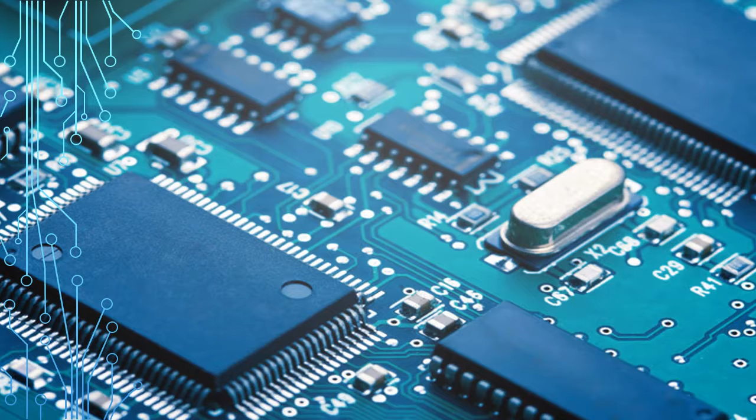Thank you. Hi, my name is Olsha Benjamin, and I will start our presentation for today. Let's begin. What is a circuit board? A circuit board is a self-sufficient module comprising of interrelated electronic components. Circuit boards can be found in devices such as cell phones, laptops, and television devices.

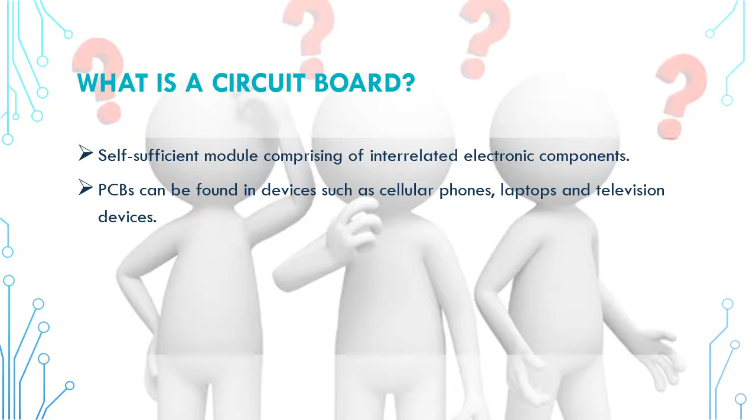When did the first circuit board come into usage? The first patent, which was called the printed wire, was issued in the early 1900s by a United States native called Charles Ducas. And what this patent said was that PCBs will have an electrical pathway directly on its surface that was insulated via printing through a stencil with electrically conductive ink.

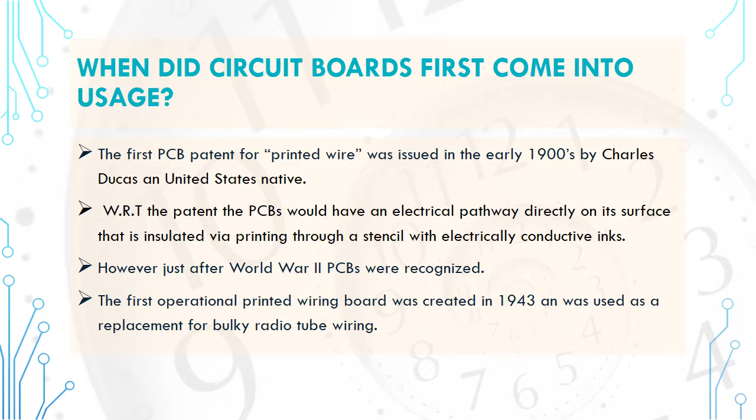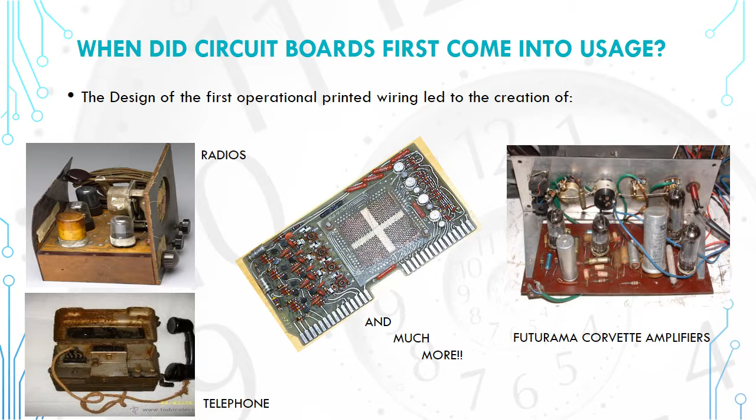However, just after World War II, PCBs were recognized. The first operational printed wiring board was created in 1943 and was used as a replacement for bulky radio tube wiring. The first operational printed wiring led to the creation of radios, telephones, and also amplifiers. The evolution of printed circuit boards: the past, the now, the future.

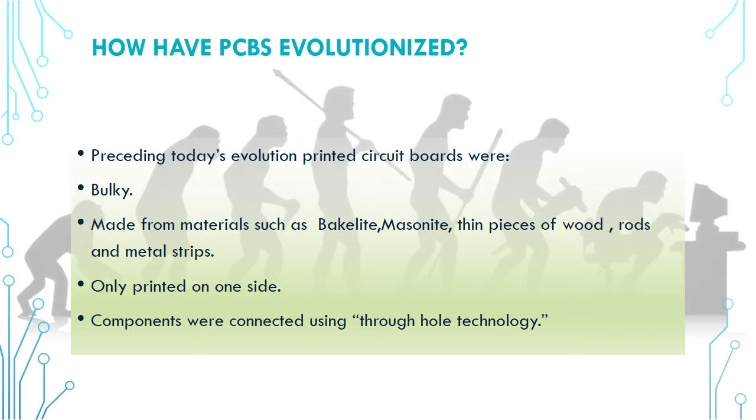PCBs now use surface-mounted technologies and are made from materials such as gold, palladium, silver, copper, fiberglass, and other materials. Circuit boards now are also single-sided, double-sided, and multi-layered. They are also small and compact.

What is expected of future circuit boards? They should use the package-on-package method and three-dimensional molded plastic boards. Also, there should be an increase of integrated circuit chip use, as well as embedded components, which will keep the design and manufacture of printed circuit boards a constantly evolving industry in the years to come.

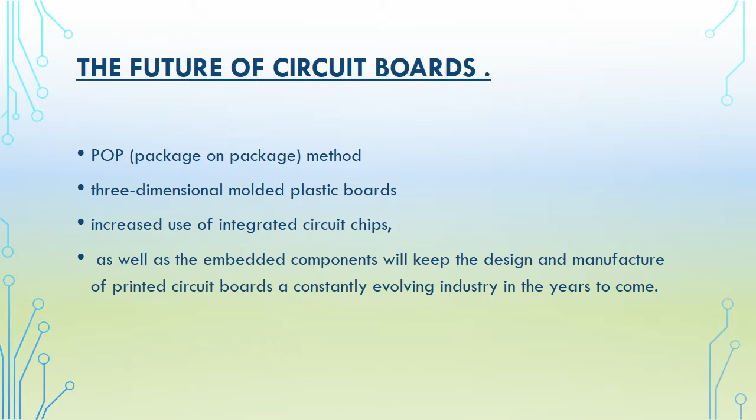Types of circuit boards. There are three types of circuit boards: single-sided, double-sided, and multi-layered printed circuit boards. Single-sided PCBs include just one layer of base material, also known as substrate. Only one side of the board would have electrical components, while on the other side, the solder is solidified to the component's lead to keep it in place. Sadly, they're rarely used because of their intrinsic design limitations.

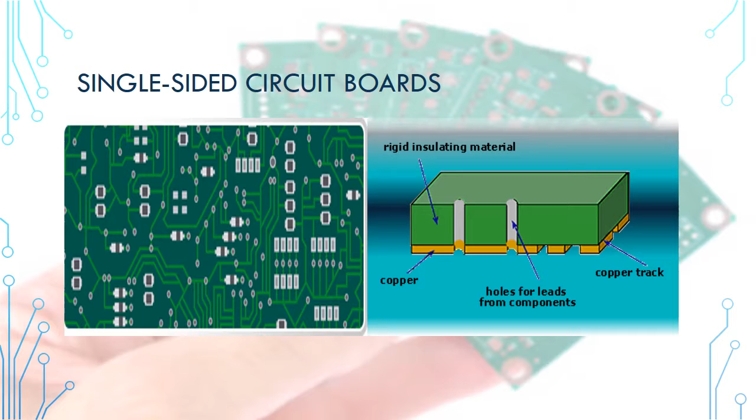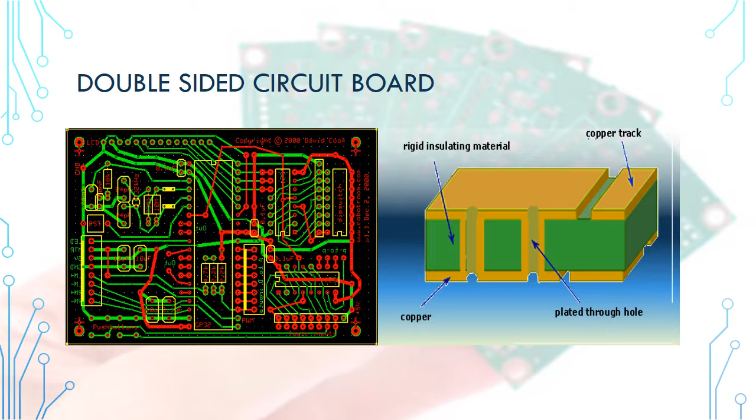On the other hand, double-sided PCBs use both sides of the board's substrate, including metal conductive layers, which elements are attached to. Holes in the PCB let circuits on a single side attach to circuits on the other side using one of two techniques: through-hole and surface mount technology, as pointed out before. Now, for multi-layered PCBs, extra layers are added beyond the top and bottom layers seen in the configuration of the double-sided shown before. This allows the multi-layered PCB to be comprised of more components than other boards discussed previously.

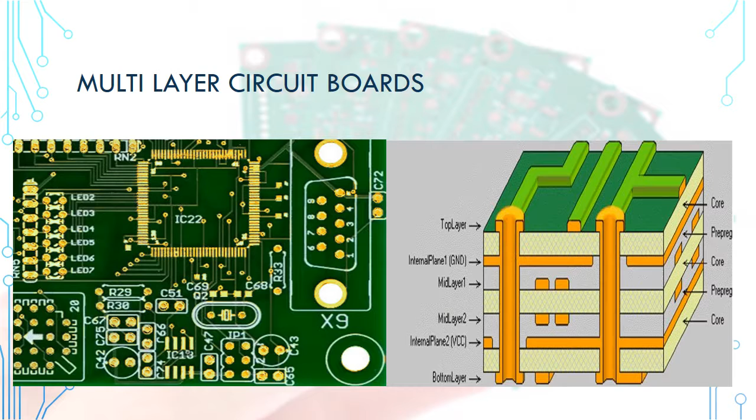An integrated circuit, sometimes called a microchip, introduced in the year 1958, is a semiconductor wafer on which thousands of tiny resistors, capacitors, and transistors are fabricated. These types of chips can function as an amplifier, timer, or microprocessor, and much more. Thanks to these microchips, more components are able to fit on a printed circuit board, thereby making it more compact and useful in today's world.

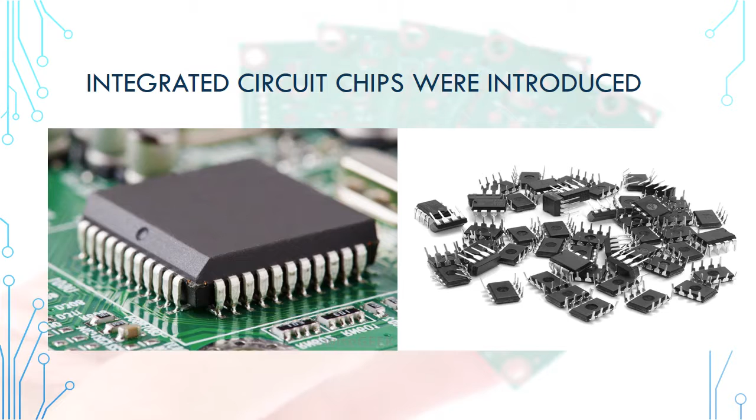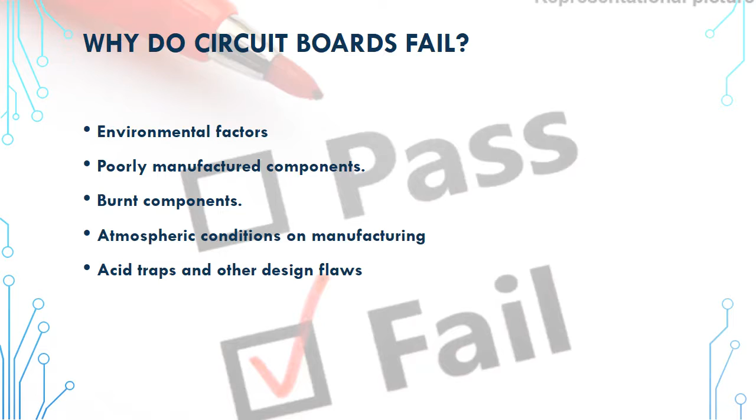Sadly, there are several reasons why circuit boards fail. These are due to environmental factors, burnt components, acid traps, and other design flaws. But it's important to recycle circuit boards. Why? Because 1. It reduces the amount of electronic scrap heading to the landfills. 2. It produces revenue for work. And 3. The working components can be reused.

The problem statement states, the disposal of printed circuit boards has always been a prominent problem in the electronic industry, since the primary disposal methods are a threat to the environment. In this regard, there is an increasing need for more environmentally friendly methods such as recycling. Industrial Solutions Ltd. has contracted our engineering firm to design a machine that is capable of deconstructing printed circuit boards, that is, PC motherboards, for recycling purposes.

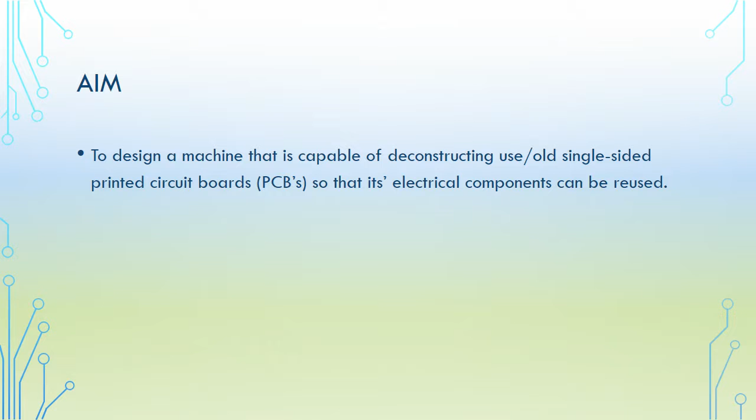Our aim as a team is to design a machine that is capable of deconstructing used single-sided printed circuit boards so that its electrical components can be reused. In order to do this, we as a team need to first accomplish certain objectives, such as to conduct a comprehensive literature and patent review, to understand the fundamental process of circuit board decomposition, to develop required specifications for the design, to develop alternative designs for circuit board decomposition, and select a design that best accomplishes the desired tasks and requirements, to test and analyze the chosen design, and also to obtain engineering and manufacturing specifications for the chosen design.

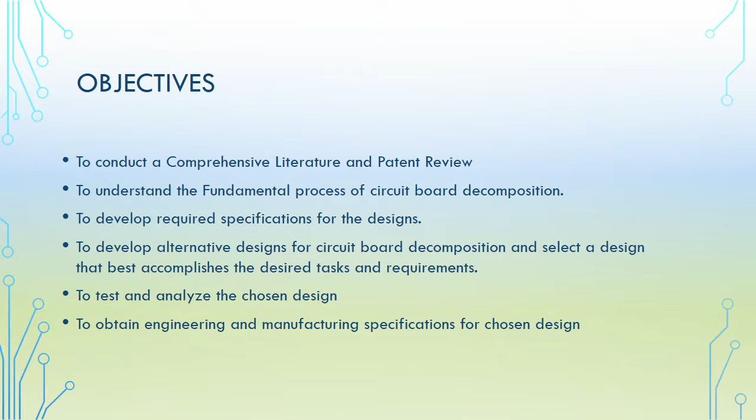Hello, my name is Makila Luke, and for this section of the project, I will be doing a general overview on the patents. Up first, we have the parts disassembly apparatus, and this patent deals with the removal of components from a printed circuit board via the disassembly of parts method, as the title implies. The PCB, which is short for printed circuit board, is heated in a furnace via an IR heater at about 190 to 250 degrees Celsius in order to melt the solder. After the solder is melted, an external force is applied in order to dislodge the components from the circuit board, and this is done with the help of metal brushes to scrape the components off.

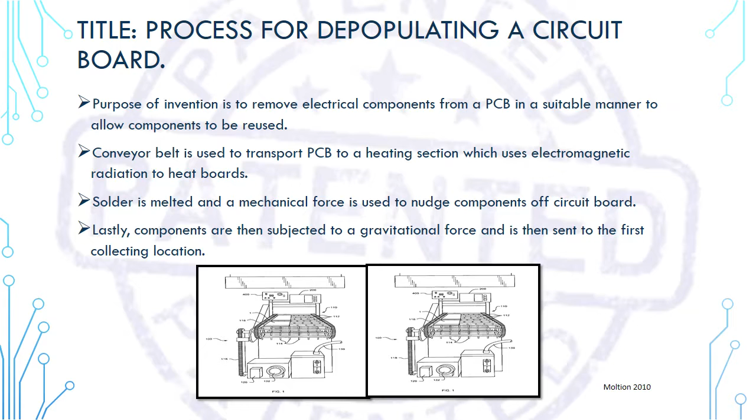Moving on to patent number 2, we have the process for depopulating a circuit board. The purpose of this invention is to remove electrical components from a PCB in a suitable manner so that they can be reused. What happens here is that the PCB is transported via a conveyor belt to a heating section which uses electromagnetic radiation to heat boards. Solder is melted and a mechanical force is used to nudge the components off the circuit board. After this is done, the components are then subjected to a gravitational force and sent to the first collecting location.

Lastly, we have the last patent, which is the process and apparatus for the automatic removal of the components. This focuses on the automatic removal of components mounted on a PCB as the name implies. The device consists of a lighting device, an optical sensor, an image processing system, and a device to remove components. The PCB is heated in order to allow the differentiation between the components and the printed circuit board, and this is done due to their varying thermal conductivities. After the heat is applied and the solder is melted, a gripper is used to take the components off the circuit board. And after the automatic removal, the components that are recyclable are sorted and stored in various slots for further use.

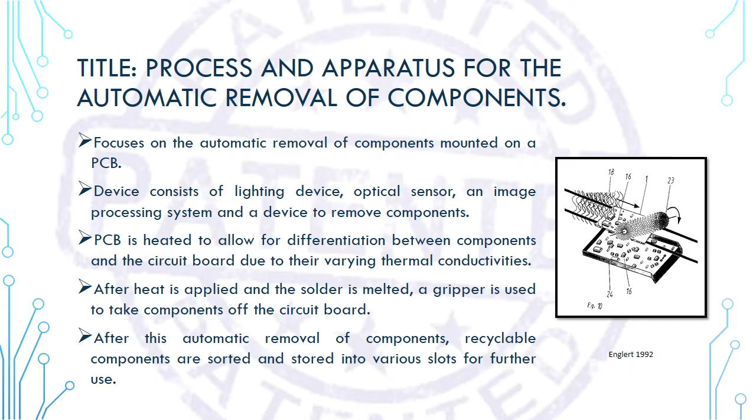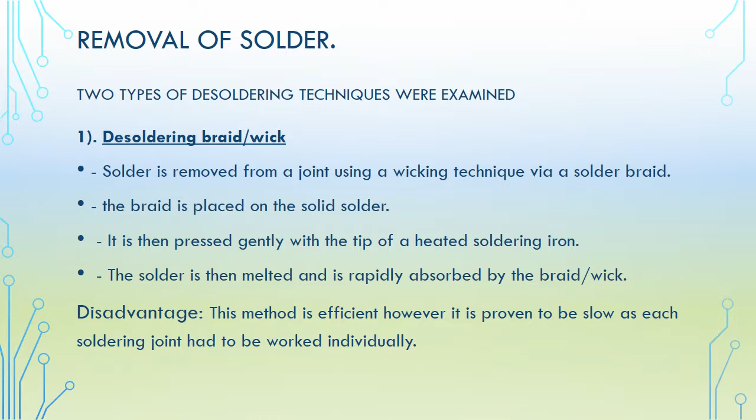Now, we will look at the removal of solder, and this is done using various techniques. However, for this project, we will be looking at two. The first one being a desoldering braid or wick. Solder is removed from a joint using a wicking technique via a solder braid. The braid is placed on a solid solder. It is then pressed gently with the tip of a heated soldering iron, the solder is melted, and it is then rapidly absorbed by the braid or wick. The disadvantage of this method, however, is that it is efficient, but it is proven to be slow as each soldering joint has to be worked individually.

The second method that we will look at is desoldering with a heating gun, and this is one of the most common methods used. The board is strategically placed on a very flat surface, and then the heating gun is used to desolder the components within a matter of seconds. The solder is melted while the components become loose, and then tweezers are used to separate the components from the circuit board. The disadvantage of this method is that it can be very difficult when small and individual components are taken into consideration. This is because heat that melts the solder on parts that are closely situated can dislodge components that are not meant to be desoldered.

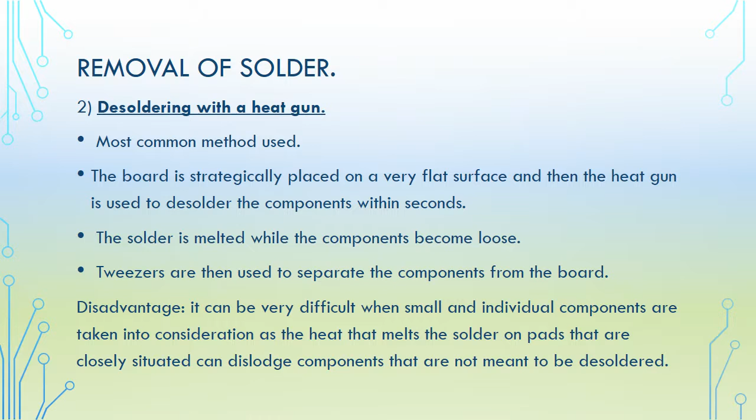The client and user requirements were then analyzed to highlight the main characteristic traits of the desired machine, thus producing portability, efficiency, user-friendly, cost, and low environmental impact.

The main attributes were then used to develop a metrics table which provides a ranking system for future design concepts to assess how well the design achieves the requirements defined by the user and client. Here shows each ranked from not good to very good.

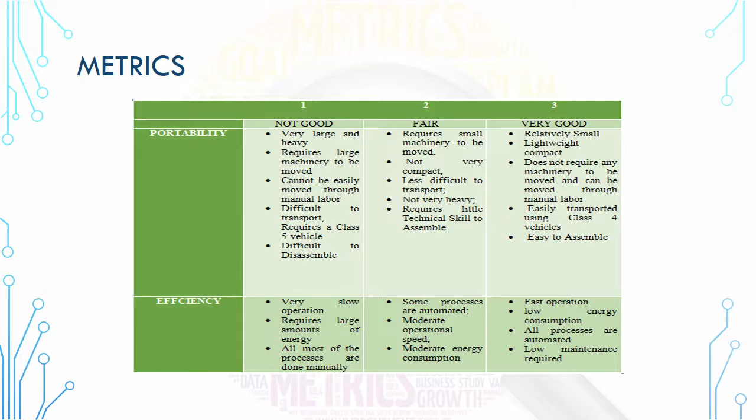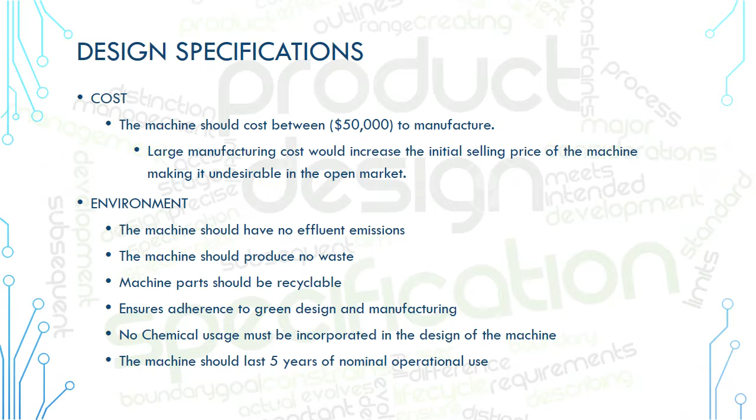Design specifications act as a framework to guide in the creating of conceptual designs that would achieve the requirements prescribed by the client and user. The following points outline the design specifications that are integral to the creation of a circuit board decomposition machine. Cost. The machine should cost between $50,000 to manufacture. Environment. The machine should produce no waste.

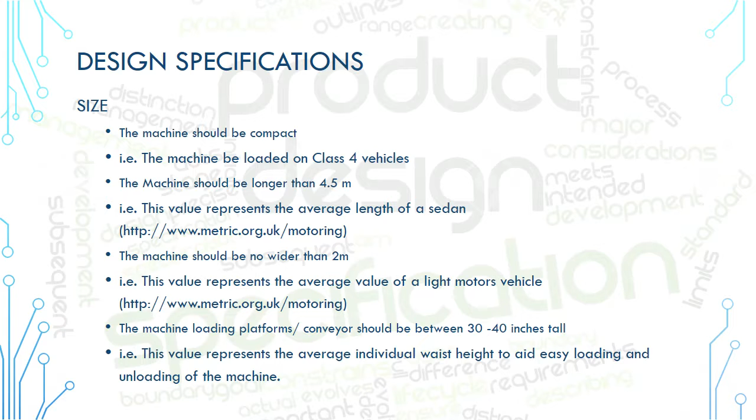Safety. The machine noise level should not exceed 60 decibels and it should be properly ventilated. Function. The machine should take less than 90 seconds to remove the components from one circuit board. The solder should be removed via heating processes. Size. The machine should be compact, meaning that it could be loaded on Class 4 vehicles. Materials. The material should be obtained locally and contain no less than 50% recyclable material.

For the pairwise comparison, each main attribute was ranked to show their importance towards creating a comprehensive design. With this, it was observed that efficiency and user-friendly had the highest ranking at 28%. Second is low environmental impact and cost at 20%. And third is portability at 4%.

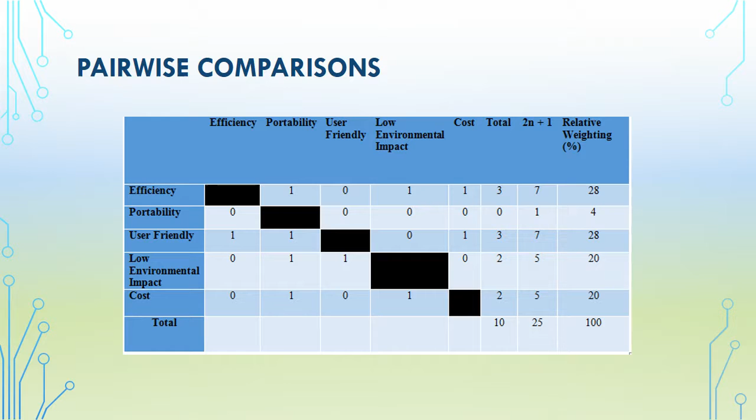Hello, my name is Ryan Cummings, and I'll be taking over for this part of the presentation where I'll be discussing the various conceptual designs that are being put forward by our design team.

In order for us as a design team to come up with conceptual designs that meet the desired client and user requirements outlined in the previous slides, we must first look at the main components of a system, which is shown here using a functional decomposition chart. The chart shown here outlines the main or important sections of a design that must be fulfilled in order to meet the desired requirements.

In order to construct a machine of this nature, the following are the required inputs that the machine needs. For example, the used/damaged PC laptop motherboards, which are destined to be recycled, electrical energy, mechanical energy, and human energy, which is then passed on to the processes, where the main process is to decompose the old/used PC motherboard. And then the output of the system would be separated electronic components, clean circuit board, heat energy produced from the various processes, and also sound and noise energy as a result of those processes.

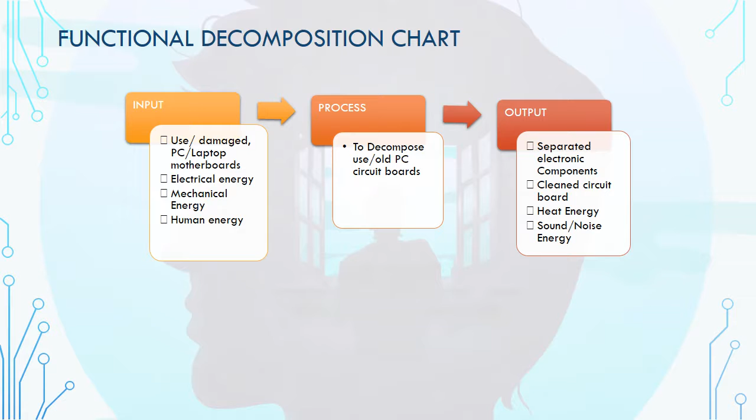The functional decomposition chart can be further broken down into a flow chart to show the various sub-processes that make up the desired machine. As you can see here, the energy input, usually inputted by using electrical energy, is converted to mechanical energy, which is used to drive conveyor belts and shaft, etc. Also, the operator inputs the mechanical energy needed, which is usually to place the circuit board components onto an assembly.

The solder is then removed, which is controlled using a signal, which is used to set the operational temperature. This process produces an output of heat energy. Also, electrical energy is needed at this point in order to generate the heat. The next process is the component removal. Then the output of the system would be the through-hole connected components. As a result, this produces sound energy, and also an output from the system would be the remaining surface components and the circuit board, from which the through-hole connections have been removed, and also a visual interface for the operator.

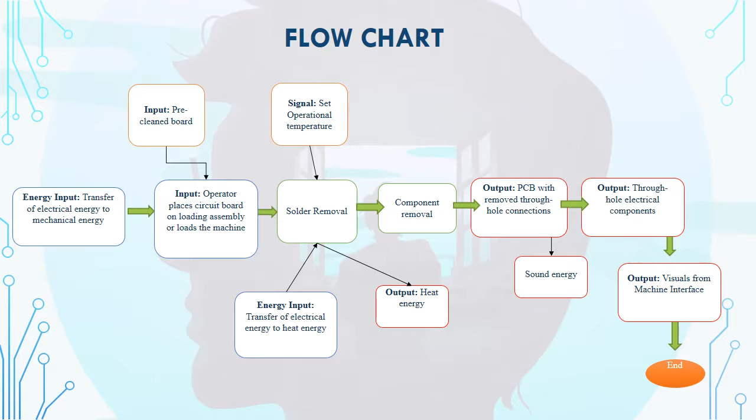To aid in the design process, a morphological chart was developed. This is a table based on function analysis and is used as a guide to generate design for the sub-processes outlined in the leftmost column. So for this chart, the sub-process needed for the recycling machine is outlined in the leftmost column, and then across the rows represents the different ways in which each process can be done.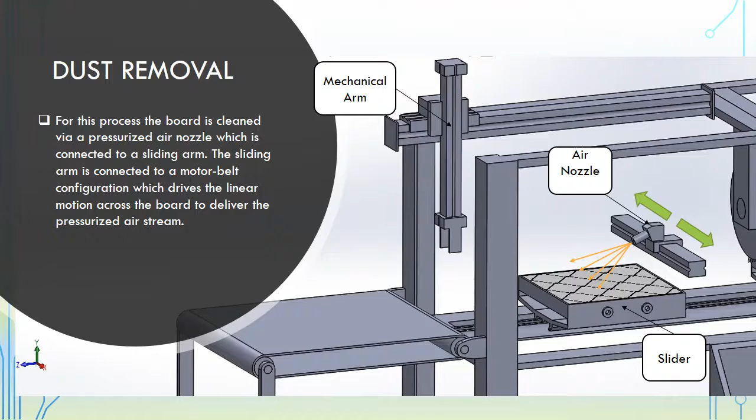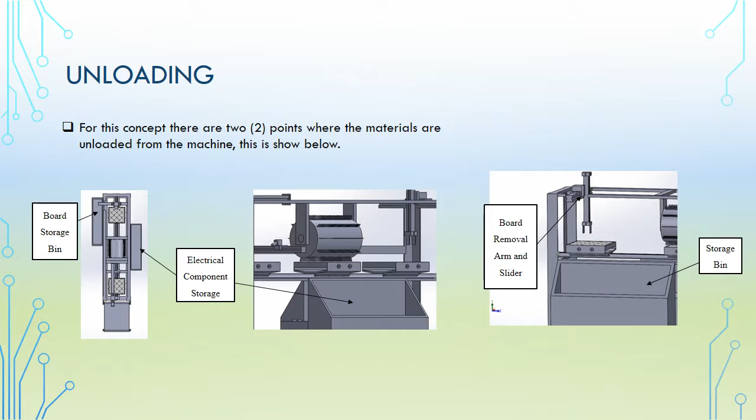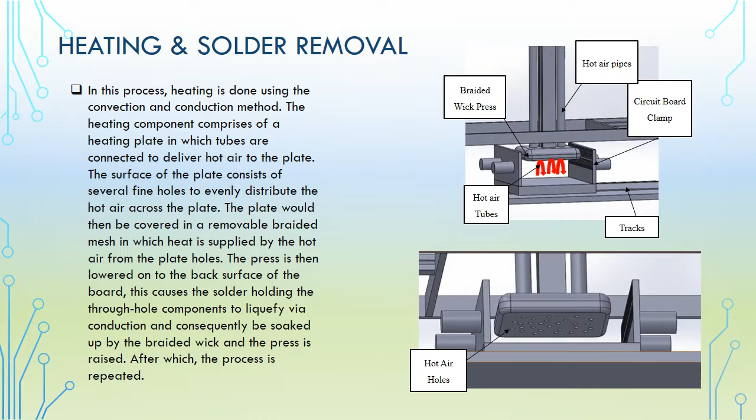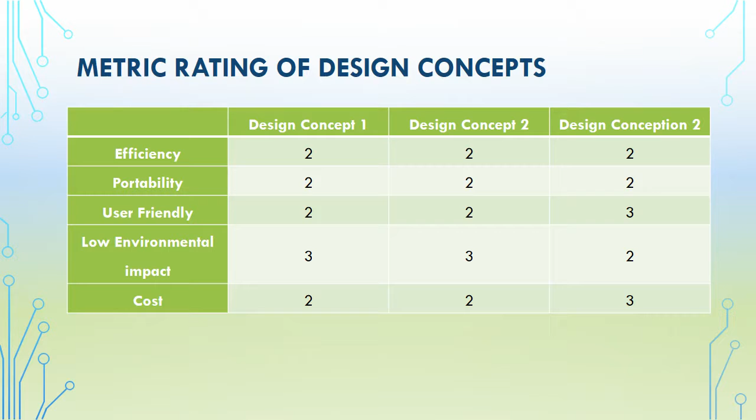Before a design is selected, it must first be judged, using the metric rating system established earlier. Each design will be ranked and their score is then recorded and tabulated in the table shown. In this table, the leftmost column represents the main attributes which were ascertained from the client and user requirements. The table shows the ranking of each design concept with respect to each category.

The raw scores were then taken and analyzed using a selection matrix, where the relative weightings of the main attributes from the pairwise comparison chart shown previously are multiplied by the raw score to produce the weighted score. This is done for each design for a particular design attribute.

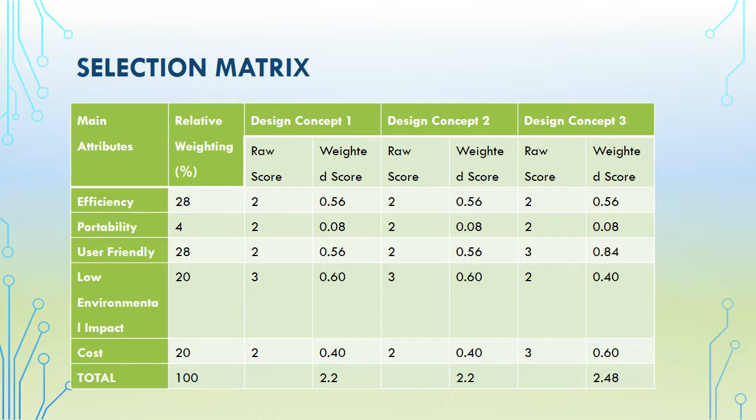For example, in the first row, under relative weighting from the pairwise chart, efficiency was found to have a relative weighting of 28%. Design 1 had a raw score of 2 in the efficiency section, which then produces a weighted score of 0.56. This is repeated for each design and each main attribute. The total is added up and then the design with the highest score is selected, as this design best meets the client and user requirements.

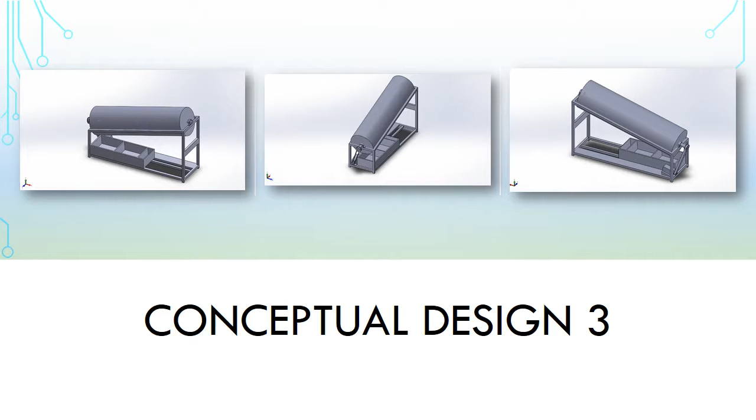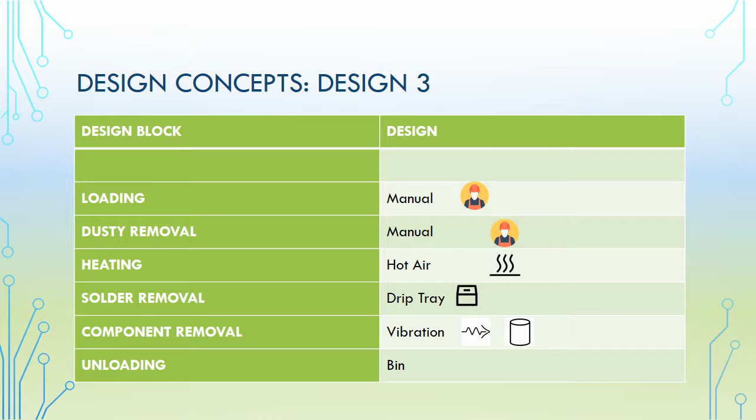And now for the chosen design. Now we will look at conceptual design three. This table also shows the morphological chart breakaway, highlighting all the major design elements used in the creation of conceptual design three. For this design, loading is done via a manual process, heating is done via convective hot air, and solder removal is done via the drip tray, etc.

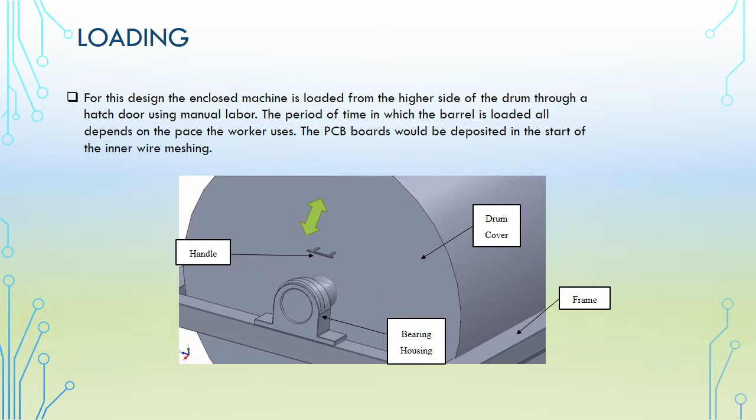For this design, the enclosed machine is loaded from the higher side of the drum through a hatch door using manual labor. The boards are deposited onto the inner mesh of the rotating drum. From this image, we can properly see the internals of the machine. The green arrow shows the directional placement of the circuit boards into the machine as they are placed in batches onto the inner wire mesh.

Heating for this machine is done via a convective process. Hot air is fed into a barrel using two insulated tubing systems and dispersed throughout the enclosure, over which the circuit board's solder is heated while in the process of component removal.

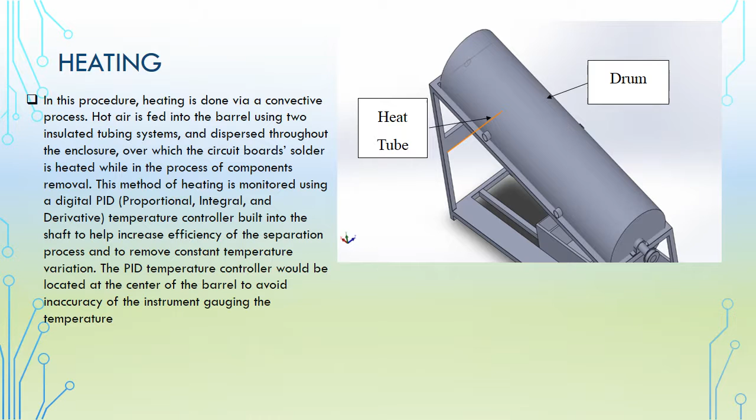This method of heating is monitored using a digital PID, which is a proportional, integral and derivative temperature controller, built into the shaft to help increase efficiency of the separation and the process to remove the components at constant temperature. The PID temperature controller would be located at the center of the barrel to avoid inaccuracy of the instrument gauging the temperature. This image shows the location of all the internal components of this design.

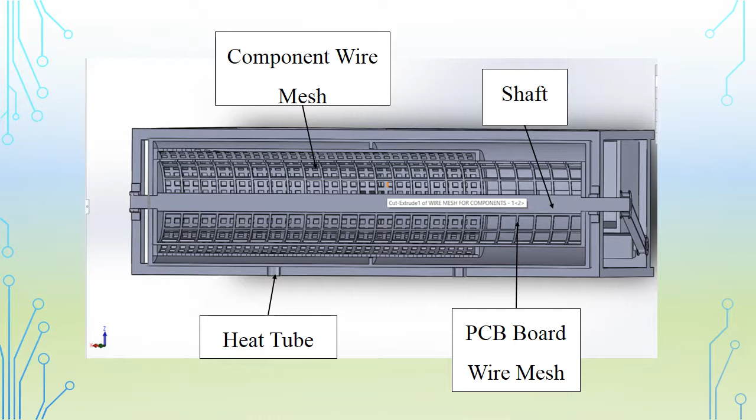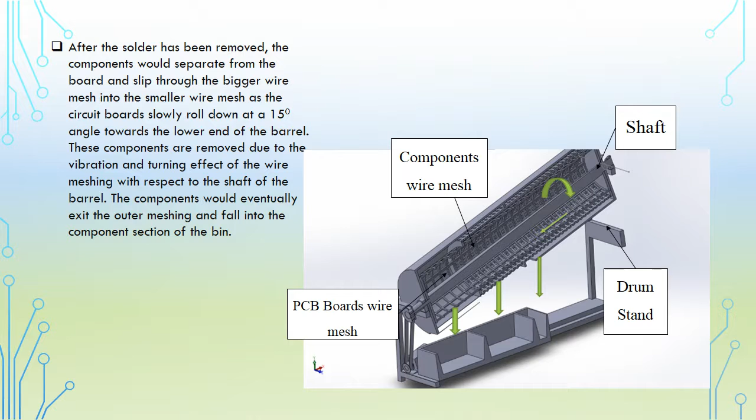After the solder has been removed, the components would separate from the board and slip through the bigger wire mesh into the smaller wire mesh as the circuit board slowly rolls down at a 15-degree angle towards the lower end of the barrel. These components are removed due to the vibration and turning effect of the wire meshing with respect to the shaft of the barrel. The components would eventually exit the outer meshing and fall into the component section of the bin.

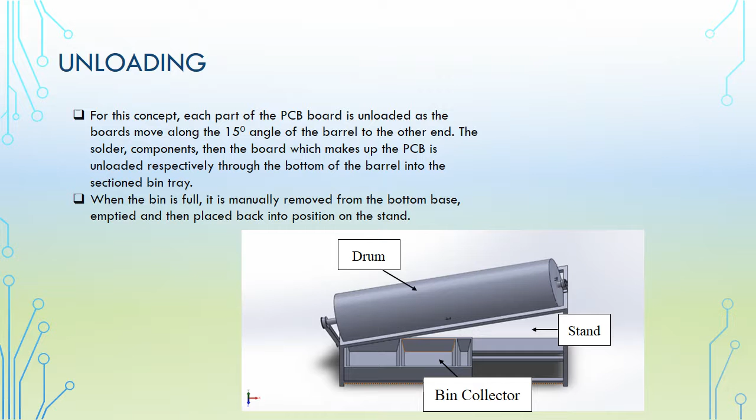This image shows the various release points for the solder, components, and PCB boards. Each part of the PCB board is unloaded as the board moves along the 15-degree angle of the barrel to the other end. The solder, components, then the board which makes up the PCB, are unloaded respectively through the bottom of the barrel into the sectioned bin tray. When the bin is full, it is manually removed from the bottom base, emptied, and then placed back into position for the next batch of circuit boards.

From the selection matrix, it was seen that design concept 3 was best suited for meeting all the design requirements laid out by the user. Some of the reasons were due to its small compact design, its ease of use, it's easy to manufacture, no technical skill is required for its operation, its scalability, etc.

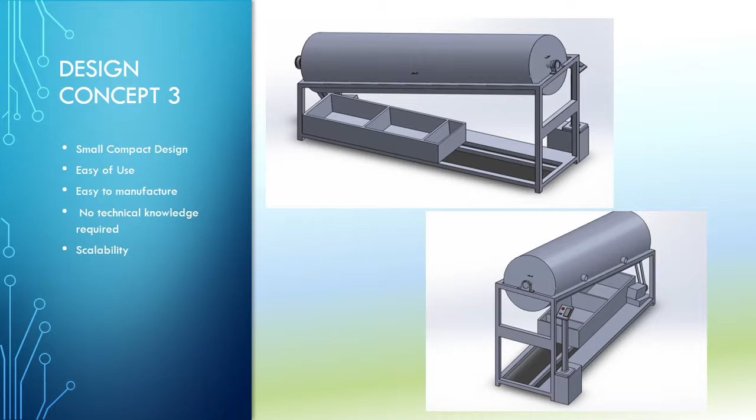Now that we have settled on a design that best achieves the user and client requirements, we must first model and analyze the chosen design, test and evaluate the chosen design, refine and optimize the chosen design, and complete the details as constructed in the model. Secondly, we must move on to design communication, which entails the description of the design process, design calculations, drawings, and design details, also the fabrication specifications.